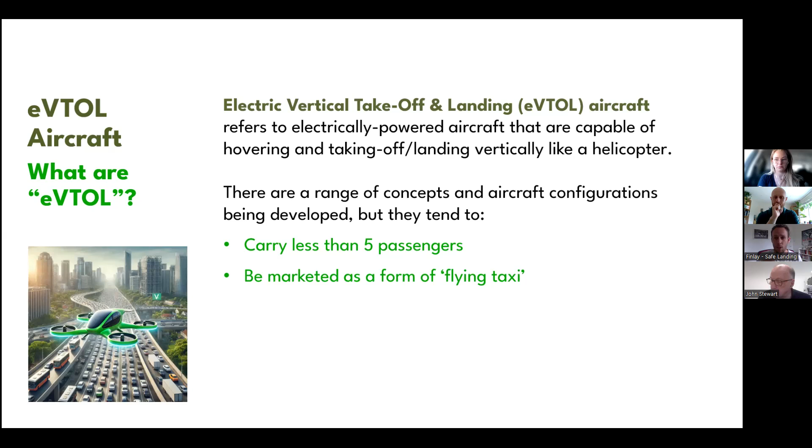But just generally, they tend to carry a very few number of passengers, often only two, usually less than five. They're usually marketed as a form of flying taxi for transport within cities, above congested motorways and highways. They often resemble civilian drones. You might have seen quadcopters that can be remote controlled, but carrying humans. Usually they have numerous propellers or fans that propel them along and provide thrust.

Generally, they are envisaged as a clean and sustainable way of improving travel connectivity, particularly within these large cities with congested roads and motorways. And they're seen as a way of improving urban mobility and decarbonizing.

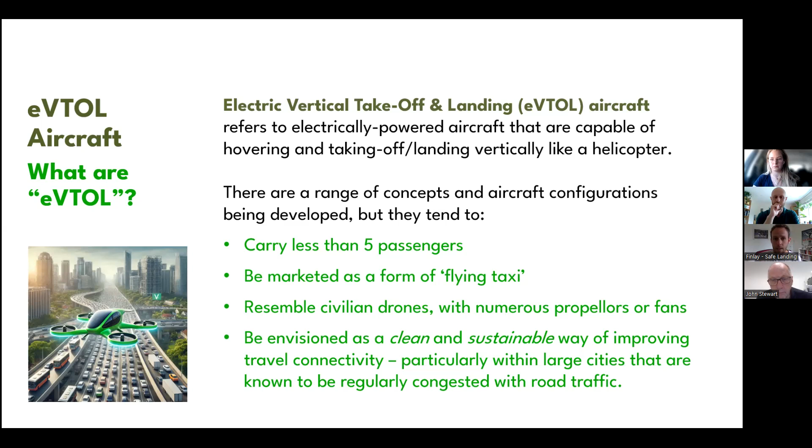So just because there's a lot of different acronyms used here, I'm just going to cover a few. But in general, as well as eVTOL, you tend to see something called advanced air mobility. This is a bit of a coverall or future air mobility coverall for everything in this topic. You get urban air mobility, which tends to be flying for like 15 minutes within a city. Regional air mobility, which is more like maybe an hour between cities. Used between rather than within cities.

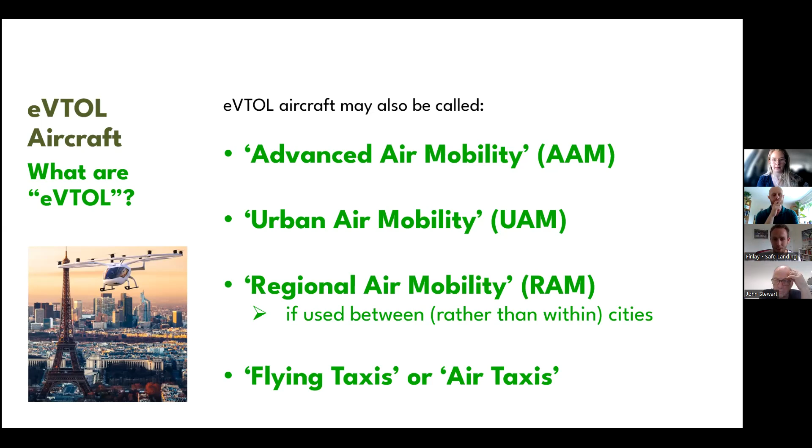They are very different sizes, shapes, and configurations. And I'll try and just explain some of the basics here to begin with. But you are seeing this evolution where there's a lot of different concepts emerging. Some of these will die off, some of them will be more successful. That's quite interesting in itself, to see what will win in different use cases as well.

But yeah, just to split these up, we've obviously got helicopters on the left, traditionally fossil fuel powered, usually gas turbines. That goes to usually a single rotor that is large for maximum hover efficiency, with maybe a smaller rotor on the tail for maneuvering in other directions.

That will then tilt as it flies, which isn't very efficient, and you're also limited on speed. It's expensive because you've got these gas turbines. Often there's two small gas turbines. That isn't that efficient. You've got a gearbox because you want to run your gas turbine at constant speed, and you need to vary the speed of the rotor. You've got quite complex mechanisms in the gearbox and also in the tilting of the propellers.

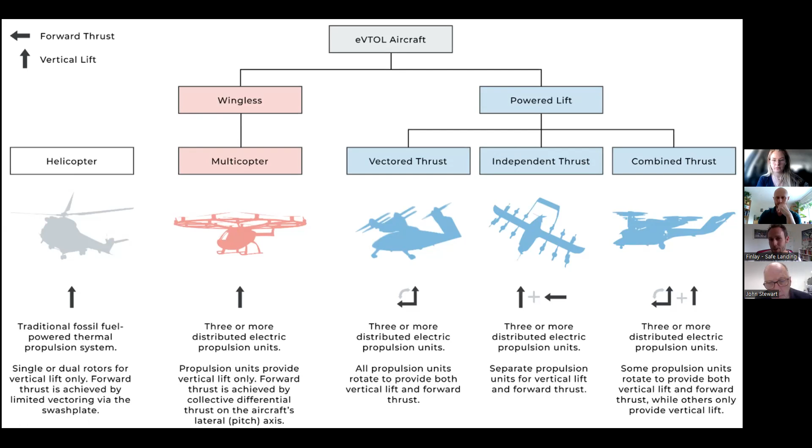And then you've got a combined thrust where you've got some rotors that move and tilt, and other ones that just stay and are just for vertical. So there's a whole spread of different options here. Vertical Aerospace in the UK, I think, do one like this. It's a little bit hard to see from this diagram, so I'll show you a moving animation in a second. But as you can see, we don't really know what the most successful option is going to be, and probably different use cases will give different best uses.

So let's cover our positions on these aircraft. As I say, these are draft. They are not set in stone, and they're open for discussion and debate. So please don't think that we're being definitive with any of this stuff. The first thing I just want to point out is that these aircraft are cool. If you are just a normal human being, but particularly if you're an aviation geek and you're looking at this stuff, you can see why it excites people. You can see why it excites the general public at large. You can see why wealthy investors like the idea of these aircraft and are giving lots of money towards them.

Can I go to the next slide?

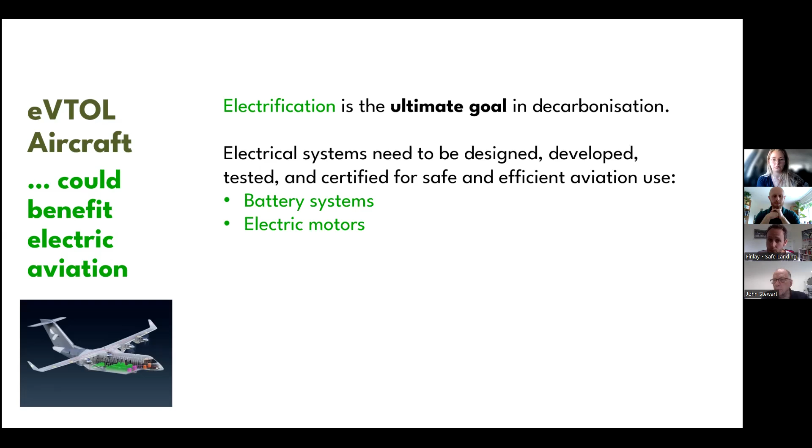So these do need to be designed, developed, tested, certified for safe and efficient aviation use. We need to look at the battery systems, the electric motors, the transmission systems between those, so like the cables, the wiring, everything, the electrical control units, the list goes on. Currently, these companies are leading the way in many respects when we look at how these technologies are progressing in terms of them being certified, because there's so many different companies that are pushing on certification. No doubt we will learn things along the way and that can be used elsewhere.

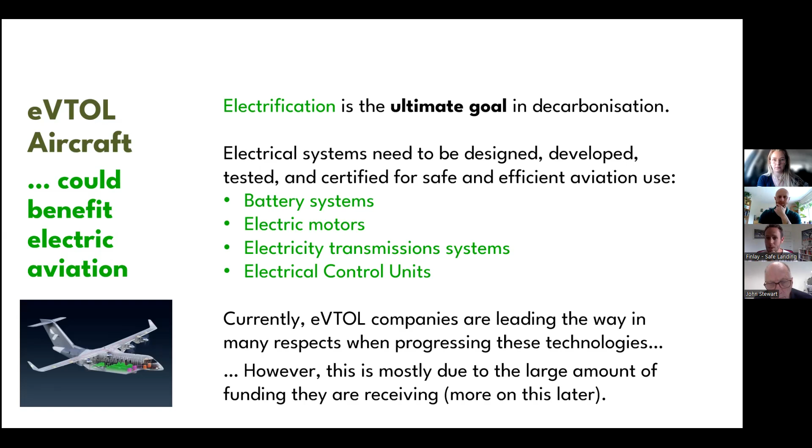However, this is really because such a large amount of funding is going there, and they're receiving far more than anyone else. Obviously, if that funding was going to fixed wing electric aircraft, then they would be the ones leading the way and also maybe wasting less money on really complex control systems. So more on that later.

Right, so now we get into some of the issues with these aircraft. The first thing is just they are fundamentally inefficient. So we tend to see these comparisons, eVTOL versus a helicopter. It's going to be a lot quieter, more reliable, safer, less expensive. Now, this is compared to a helicopter, which is an expensive thing to do. eVTOL do cater to a niche area. It's short journeys where you can take off and land on relatively small areas like helipads, basically what we do with a helicopter journey today.

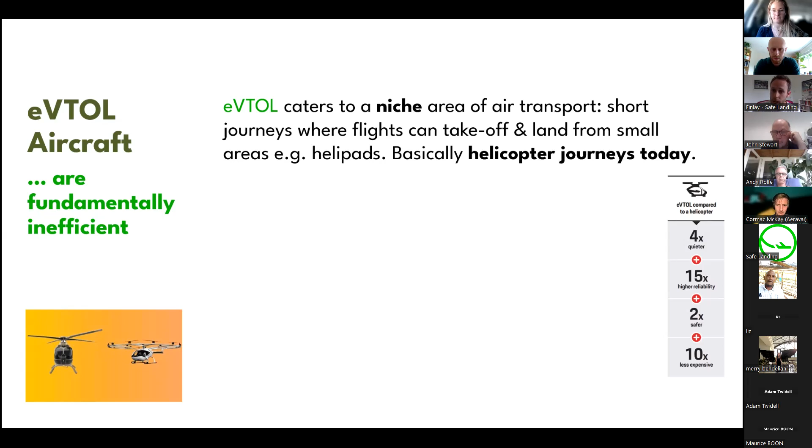And the idea with this is it will make them very flexible. You can fly into the middle of a city, from the outskirts right into the center. It's difficult to do that if you need to build a long runway. So they're kind of going for flexibility and versatility, but when you do that, you sacrifice efficiency. Now, the idea is that eVTOL will revolutionize this market through electrification, basically because these electric motors are small, simple, and cheap. It makes it a lot easier than the complex mechanical system with a gas turbine. Recharging is also cheaper than burning fuel.

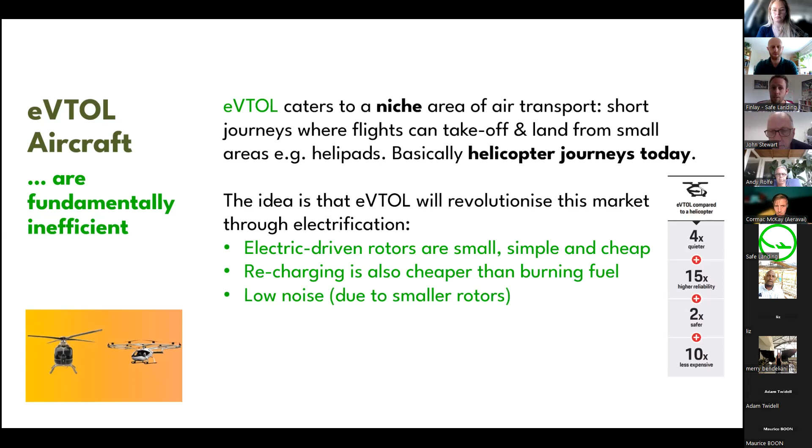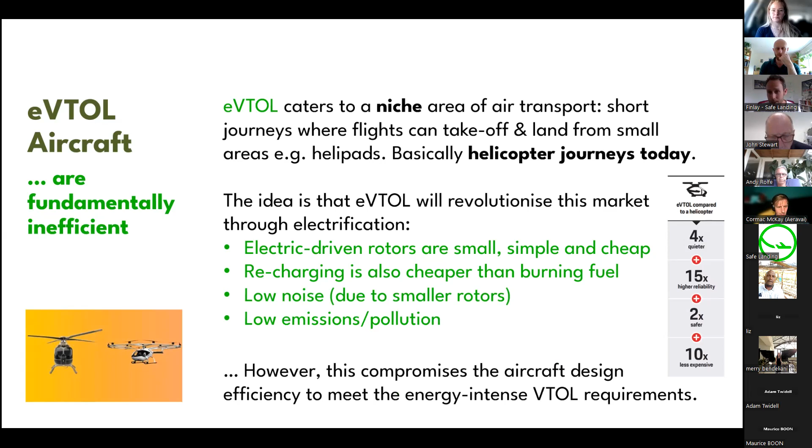Because the rotors are smaller, they have lower tip speed, they should be quite a lot quieter. That also should be lower emissions and pollution than running a helicopter. However, all of that compromises the aircraft design efficiency in order to meet these energy intense vertical takeoff and landing requirements. So the fact that you're trying to take off and land vertically will mean that you become more inefficient and energy intensive. So just to give you a comparison from an aerospace engineering perspective here, eCTOL is conventional takeoff and landing, VTOL is vertical takeoff.

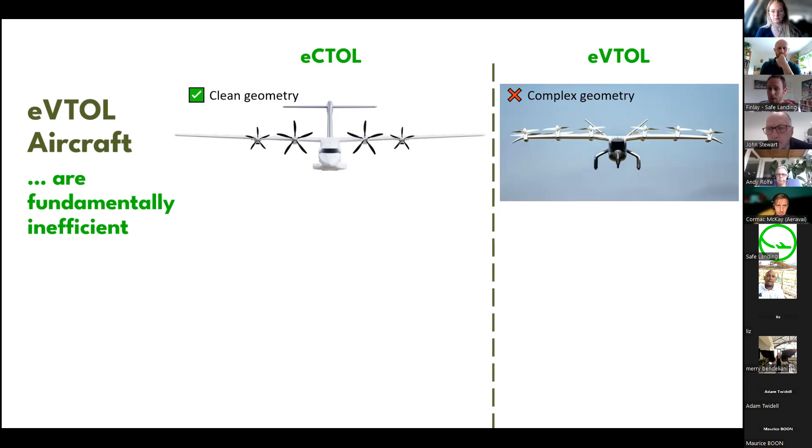So the first thing, if you look at the front, you've got on the left, conventional aircraft, electric, clean geometry, minimum drag. On the right, you've got complex geometry. That's maximum drag. Obviously, it looks relatively aerodynamic, but you've got lots of different features. Those are all creating turbulence. They're all cutting into your laminar flow, and they're increasing drag and increasing energy use.

Again, with fixed wing, you've got an aircraft that's really well optimized for an efficient cruise operation. This is where aircraft are most efficient. Part of the efficiency of aircraft comes from cruising at higher altitude where there's lower drag and you can be as efficient as possible. With a vertical takeoff, you're compromised at cruise, and also you're compromised at takeoff and landing because you're trying to design for cruise as well.

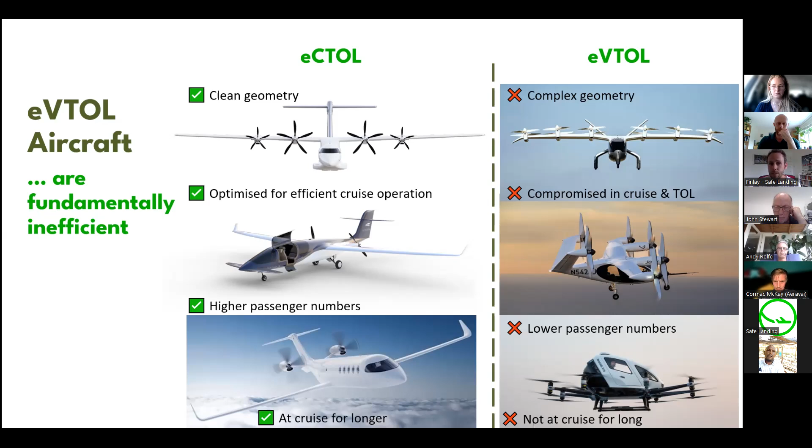You spend a lot of time in climb, descent, and landing, and not that much time at cruise. So with conventional, you can have much higher passenger numbers. This is good for load factor, it's good for efficiency. Low passenger numbers for vertical takeoff and landing does the reverse. You're at cruise for longer with conventional, you're not at cruise for long with vertical. So these are all not good things from an engineering energy perspective.

Now, really because of this, they're then not an effective mass transit solution. It's not to say they won't be used for transiting small amounts of people, probably wealthy people that can pay for a more energy intensive mode and want that flexibility. But when we're talking about revolutionizing urban mobility, I think we need to be asking questions.

Now, there's a clear kind of priority in this. Obviously, we want to be having active travel where we can. If we're using a car, we also want to be maximizing utilization in the car, having lots of people in it rather than single occupancy cars. Buses and trains are on the ground and are really efficient uses of electricity, high load factors. And then you've got conventional electric and then vertical takeoff electric.

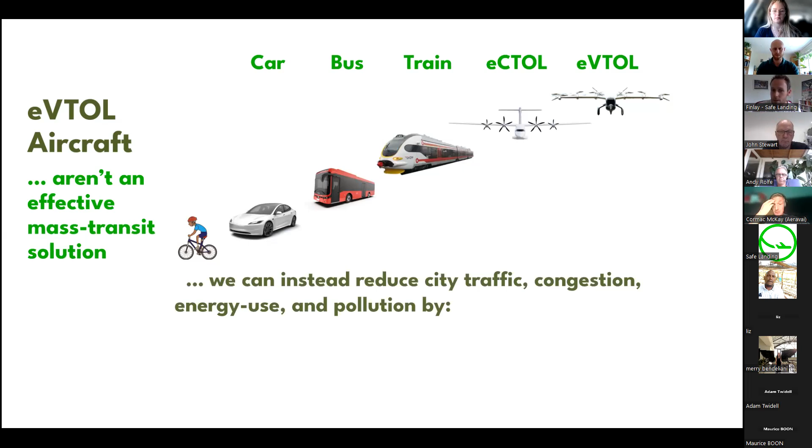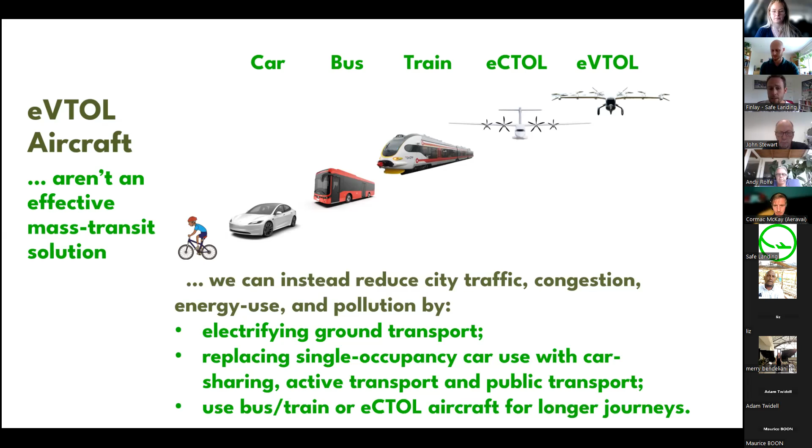Now, we can reduce city traffic, congestion, energy use, and pollution by electrifying our ground transport, by replacing single occupancy cars with car sharing, active transport, public transport. And we can use the buses, coaches, and trains and conventional fixed wing aircraft for longer journeys. That's how we improve our mass transit system.

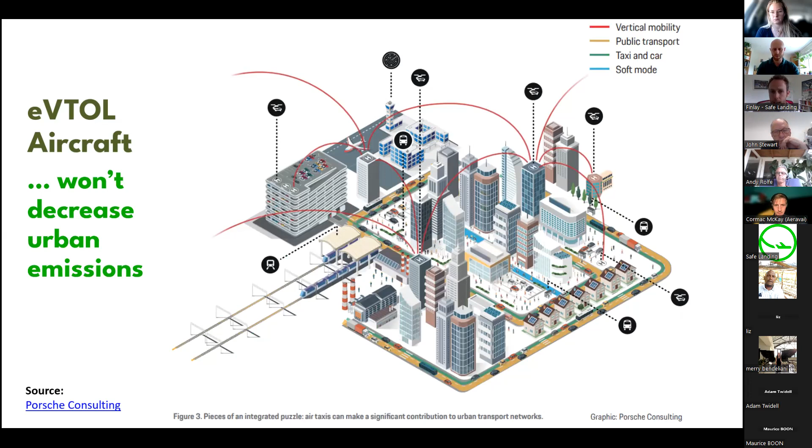Now, I don't really think that they're going to decrease urban emissions. The argument is that they can take certain journeys out and people will be able to leave on a helipad and get somewhere outside of the city, and that will take cars off the road and improve congestion. But the reality is you really want to be using public transport where you can.

So I've been to the centre of London. I've been out to Heathrow. I know you can take the tube and then you can take the train. It's quick, it's low energy, it's easy, and it's accessible. Now they're claiming rather than take the train, which takes an hour, they can get you there in 8 minutes. I also think that's a bit disingenuous when you include the other factors in that system.

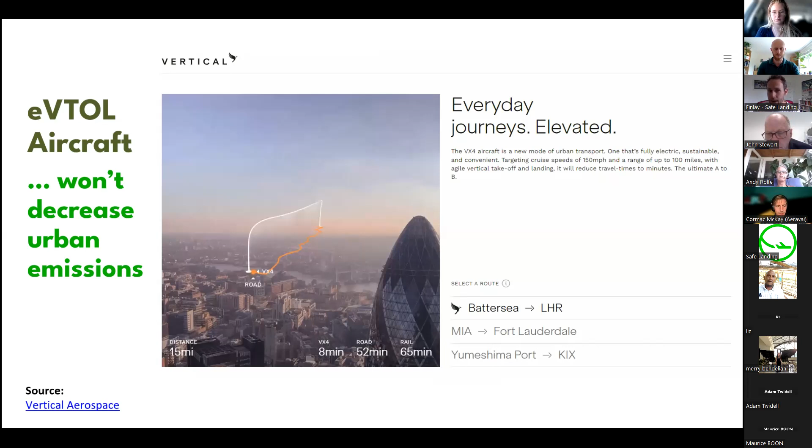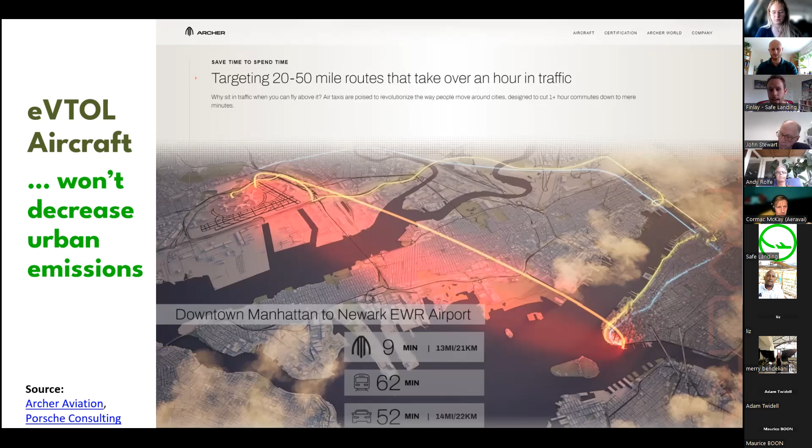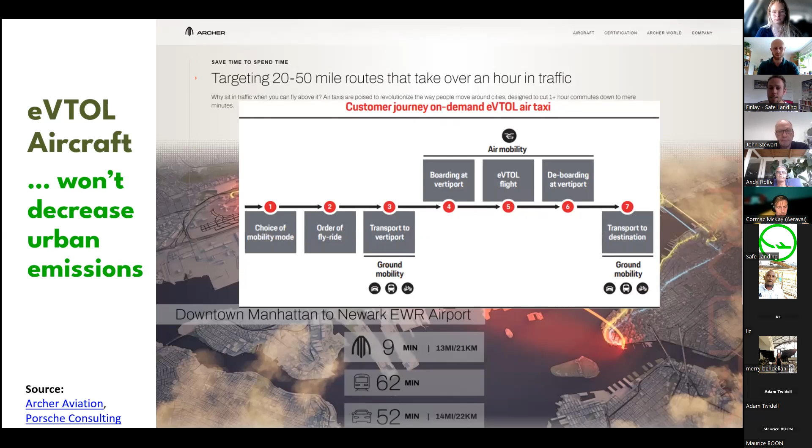This is Archer. This is looking at downtown Manhattan in New York to Newark Airport outside of New York. And you can obviously take the train, you can drive, or they're saying you can fly, and similarly, an hour on the train, 9 minutes. Now, the thing about this is you obviously have to actually order a taxi, get to the vertiport, board your aircraft. The flight, which might take 10 minutes, is there. You then need to disembark, and then you need transport to your final destination as well.

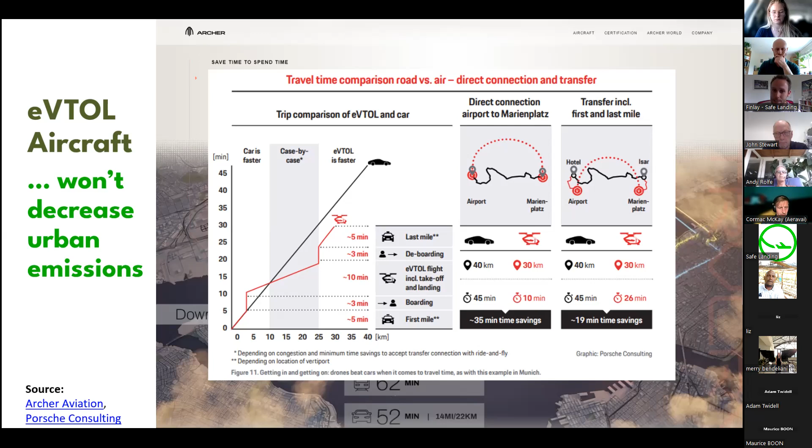This was a study looking at Munich Airport to the center of Munich. Sure, you've got that 10-minute flight, but actually 10 minutes becomes more like 26 minutes when you include that stuff. So it's not so much of a saving as it seems. It is faster, but it's a lot more energy intensive.

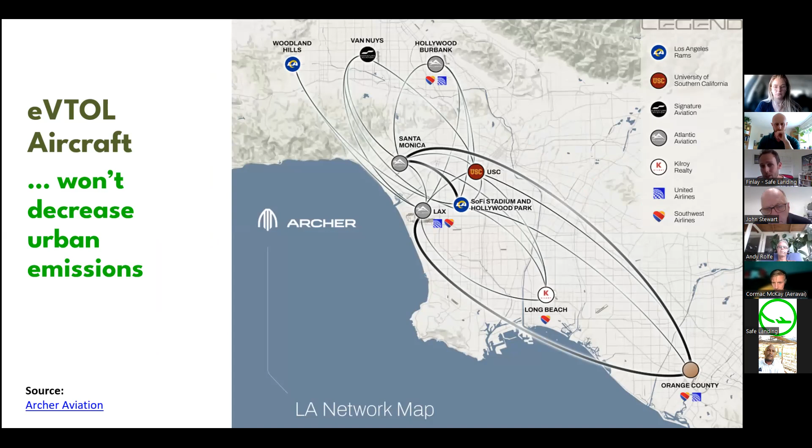Archer, this is them looking at Los Angeles. You can see that Los Angeles Airport is a major hub here. They're also going to different sports stadiums and the university. And they're going to Van Nuys, which is a private jet airport. So you can see that maybe private jet users might fly into Van Nuys, take an eVTOL to LAX, and then fly long haul to Heathrow, and they can do that a lot quicker. What's that going to do to aviation emissions overall?

Now, I've been to LA myself. I tried to use public transport there, and people were kind of a bit horrified at me doing that. I also took the train to San Diego, which was a bit of a joke train. So I think when it comes to America, we need to improve your public transport, rather than look at these kind of crazy technological ways to try and avoid doing that. So we think they actually might increase aviation emissions.

I've alluded to this already, but one of the main use cases you see from this is getting from a large long-haul airport into the center of the city quickly. You can imagine people flying into Munich for the day, flying into the center, doing some business deals and flying out. Do we really want to be encouraging this and making it easier?

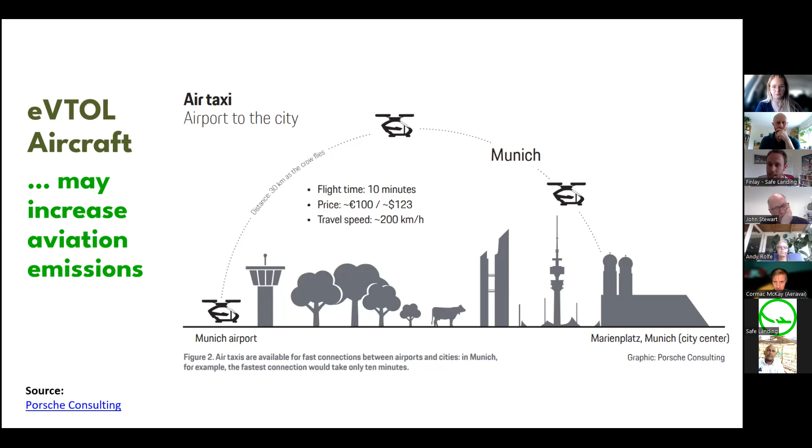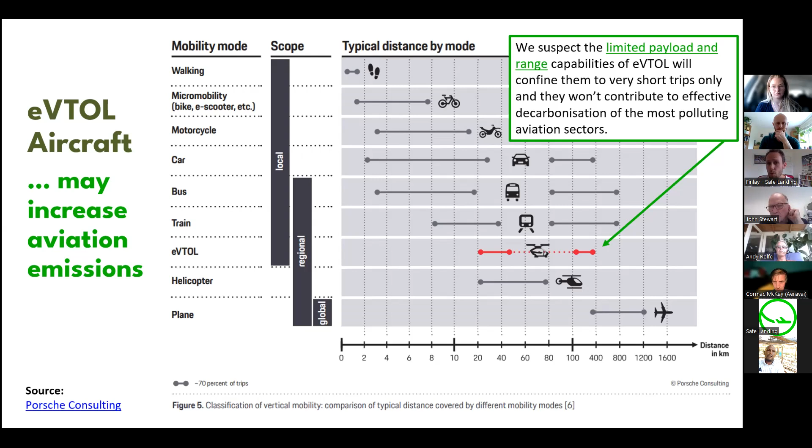If you look at where eVTOLs sit, they sit in a range that will be competing with ground transport or helicopter, not competing with long range air transport. We think that the limited payload and range of these means they'll just be short trips. They won't be effective decarbonisation of the most polluting sectors of air travel.

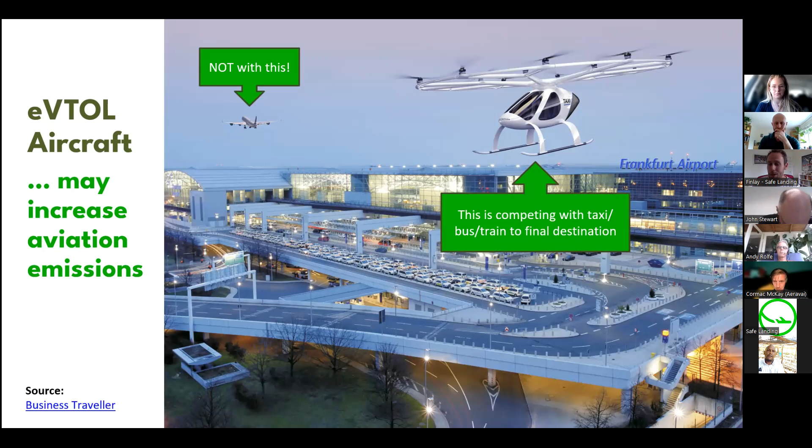In fact, as I say, these are competing with taxi, bus, train to final destination. They're not competing with long haul air travel, which is producing most aviation emissions. And actually, they might supercharge these emissions because they make airports more accessible, and they encourage people to take day trips or weekend trips. We don't think that they will democratize air travel either.

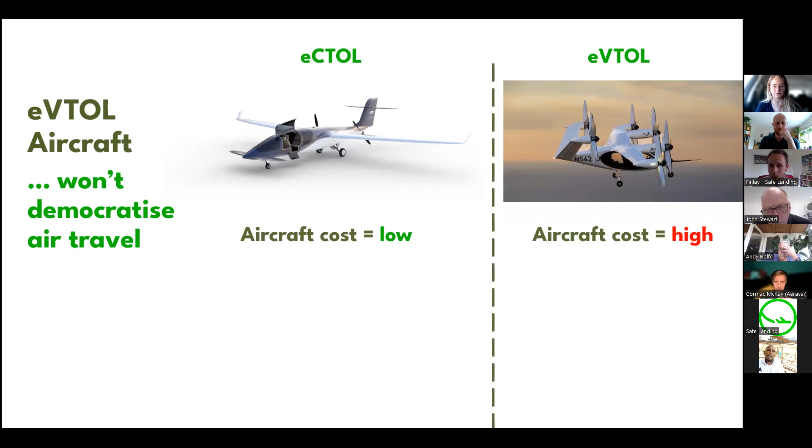If you look at conventional versus vertical, you've probably got a lower cost for the aircraft if you've got fixed wing, a lot less complexity, a lot less cost. Energy intensity is lower, so your fuel costs are likely going to be lower. Certification, more likely to be simple, less costly. That helps the aircraft cost. A lot more complex if you've got lots of moving parts. Operation itself is more complex with vertical takeoff and landing.

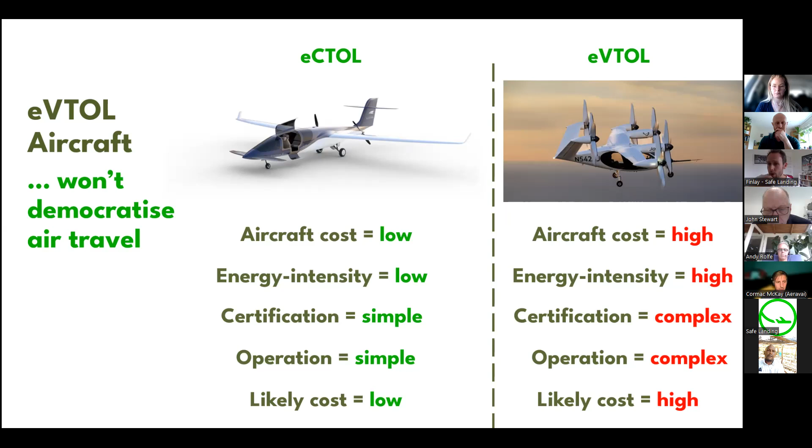So all of these things sum up to be, if you're looking at Africa and you wanted to improve connectivity there, I would be looking at the left rather than the right, personally. So, final thing, getting near the end here, we don't think it's necessarily the best use of time or talent within the aviation sector. So, as we say, most finance in this area is being directed towards eVTOL startups.

That will provide some benefit towards electric aircraft R&D as a whole. However, public and private finance is limited. We don't have infinite pots of money, particularly at the moment. That means we're losing focus on other areas of aviation development, and that causes issues. So firstly, time. We've only got 10 years, probably less before we blow our carbon budget. We really need to develop the true solutions quickly if we want to be able to fly in the future.

Next is talent. We're always complaining that there's a lack of STEM, science, technology, engineering, maths workers. We need more in the pipeline. Well, this was something that really frustrated me at my company. Some of our best engineering minds were working on this sort of stuff or supersonic aircraft, and they weren't working on the most impactful areas to decarbonize aviation. I think that's a real waste and a real shame.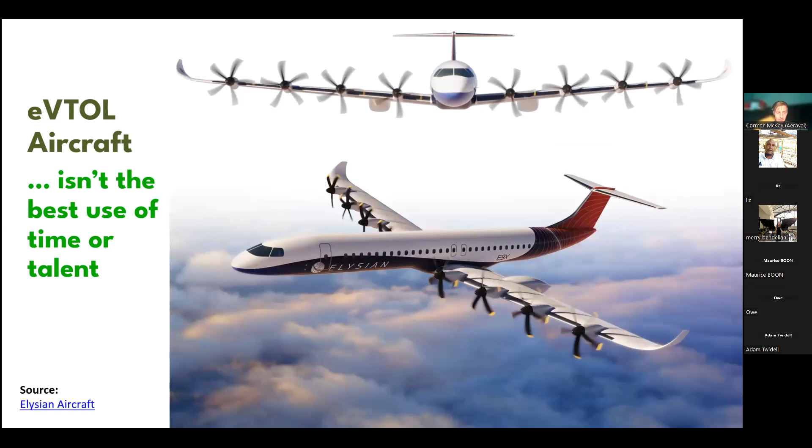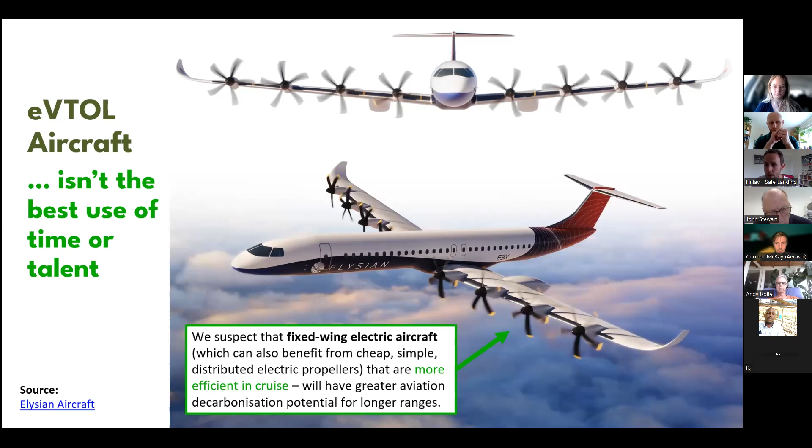What would be a better use of funding, time, and talent is fixed wing electric aircraft. These also benefit from cheap, simple, distributed electric propellers, but they're more efficient in cruise and they have greater decarbonisation potential because they can go to longer ranges and compete with existing markets. So, summary of our positions. Firstly, they are cool. We can see why people are excited. Yes, they probably can benefit and progress us towards electric aviation.

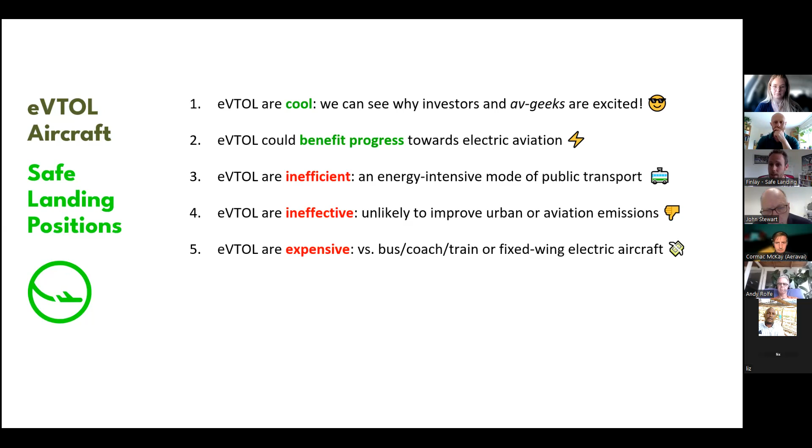However, they are inefficient. They're more energy intensive than other modes of public transport. Ineffective. They probably won't improve urban pollution. They probably won't reduce aviation emissions. Expensive, compared to other modes of public transport, compared to fixed wing electric aircraft. Not the best use of money. We need to prioritize our funding.

I'm not saying that these companies shouldn't be getting any, but the disparity is very large and I think should be questioned. And that kind of involves questioning some of the other things. And that's why we're being a bit critical here. They're also not the best use of time. We really need to prioritize our activities, and not the best use of talent. We need to prioritize our workforce.

So yeah, keen to stop there. Sorry for taking slightly longer. But what would be great now is to get into some discussion about